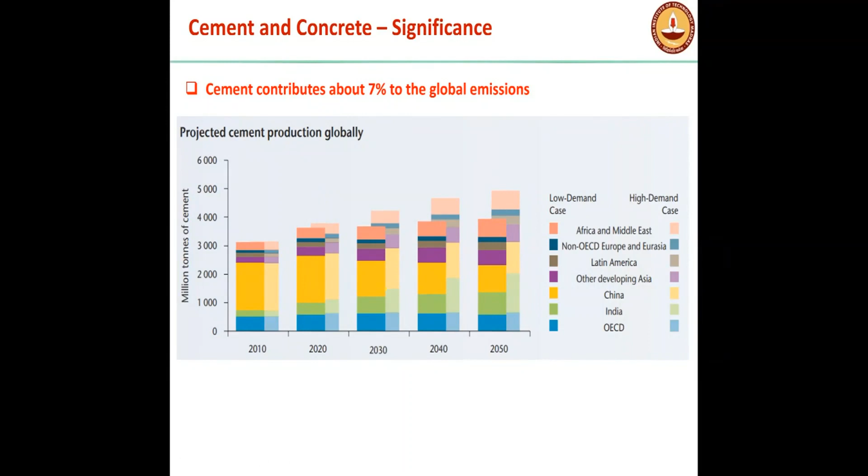So this means that whenever we can use less cement, if we can make cement more sustainable, we are going to do ourselves and the planet Earth a big favor.

Why is this relevant to us? I will focus on India. I will show examples of India. This can be extrapolated to all developing countries for sure. India is the second largest producer of cement in the world, though it is also one of the most energy efficient. Now, in this scenario, what can get worse?

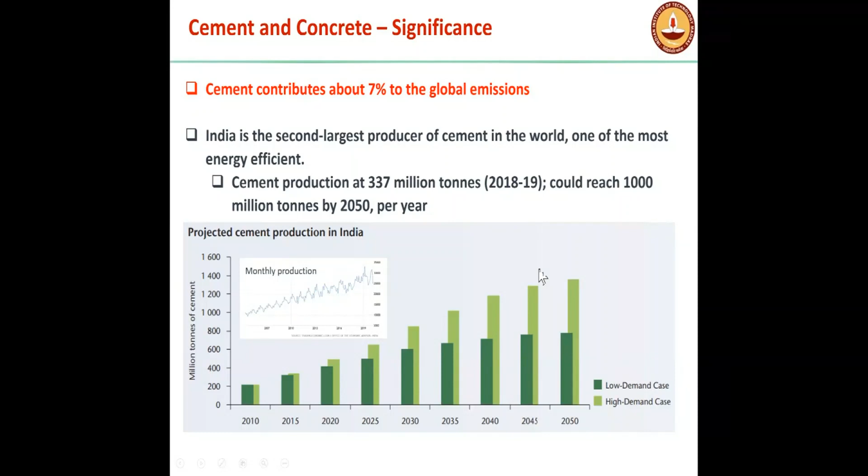So for sure, we are going to use a lot of cement. The fact that we are producing so much cement means that we are also using a lot of concrete, estimated at 1,000 to 2,000 million tons per year, and this could reach about 5,000 million tons. Why? Because we have to build a lot.

Just like India, there could be many other countries in the world which need to build a lot. We need to provide housing. In India, it is expected that we would need 15 to 30 million units, 10 billion square feet. Our highway network is expected to double within this decade, from about 110,000 kilometers to 200,000 kilometers. So this means that we are going to use a lot of concrete. For this, we need a lot of cement.

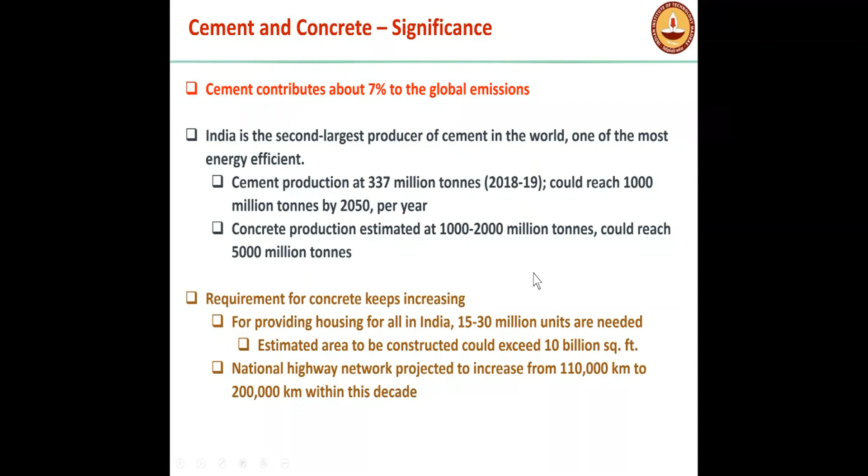So what do we think about the sustainability? Concrete, I believe, is sustainable for several reasons.

It provides jobs in the construction sector, especially for unskilled workers. Of all the materials we have, concrete has lower embodied carbon footprint. It requires less energy than many other materials out there. Raw materials are reasonably abundant in the world today. We have enough limestone, and other materials that we can use for making cement and concrete. Construction with concrete provides for strength, safety, and healthy living conditions.

We have seen in many of the lectures that concrete came up again and again. We talk about rehabilitation, we talk about resilience, and concrete is always there. But things are always not great.

Quality is something that is not always ensured. When we are talking about a material like concrete, which can be made anywhere, we are not sure about the quality. Durability is not designed for nor guaranteed. We heard a lot about durability in this session from Professor Basheer and others earlier. Durability is something that is very important. We don't give it a lot of attention. We need to, certainly.

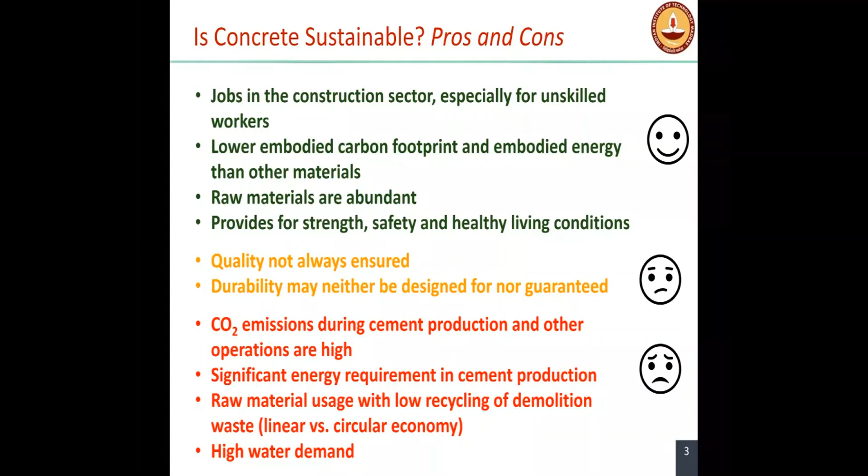So for considering all this, what will happen in the future? We expect changes. Fuels could change. We don't know if we will have all the fossil fuels, what restrictions will be there, and can we utilize alternative fuels.

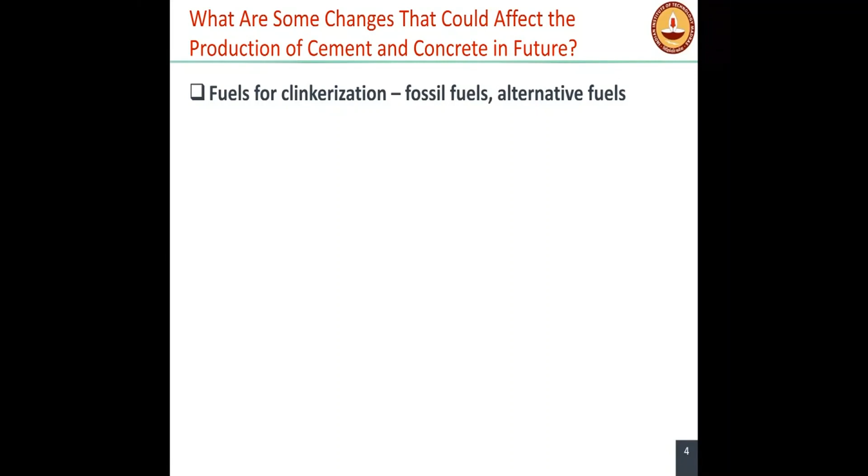What will happen to the consumption of electricity? Will there be enough electricity for cement? What will happen to the carbon footprint of electricity? We have seen that we incorporate a lot of supplementary cementitious materials. We reduce the amount of clinker in the cement. Will that continue?

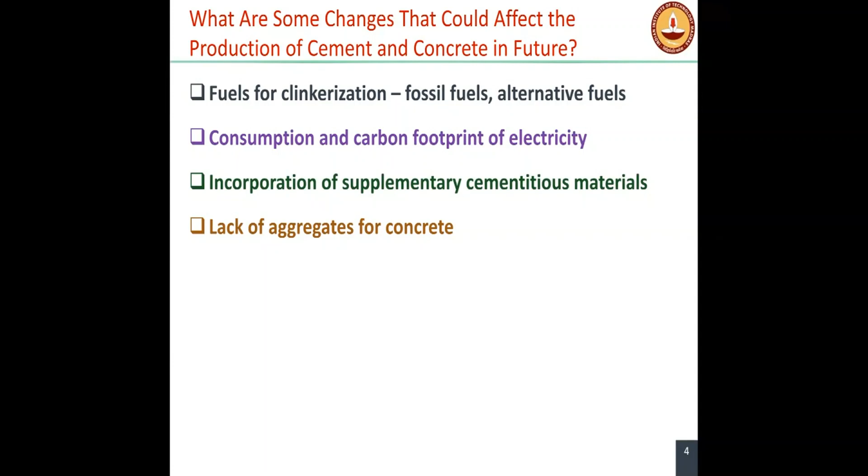Aggregates are a big problem in many of our regions. What will happen if aggregates are not there? Will we continue to make sustainable cement and concrete in the future? So the question is, will the sustainability of concrete be affected? In what way and how much?

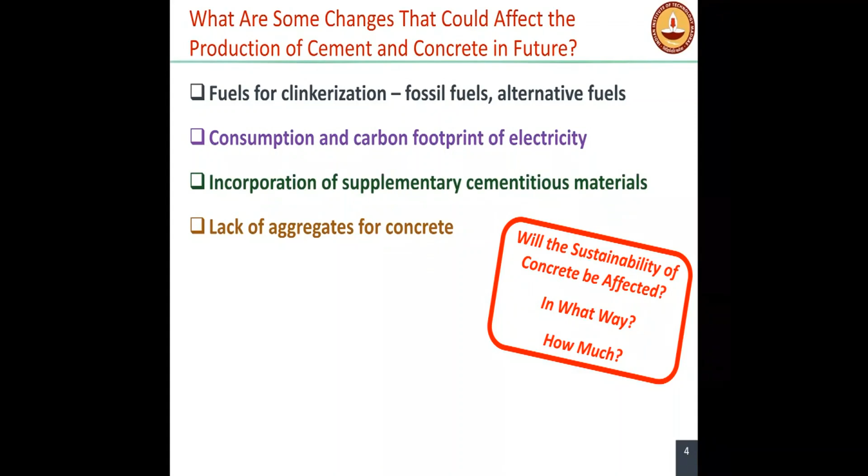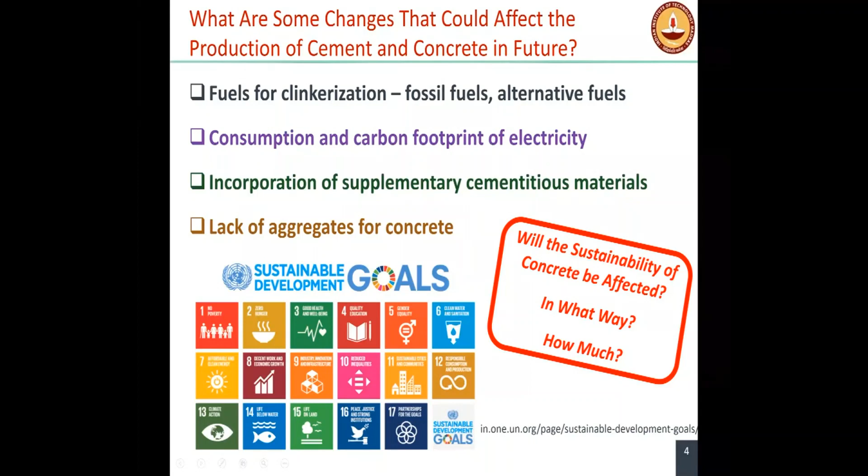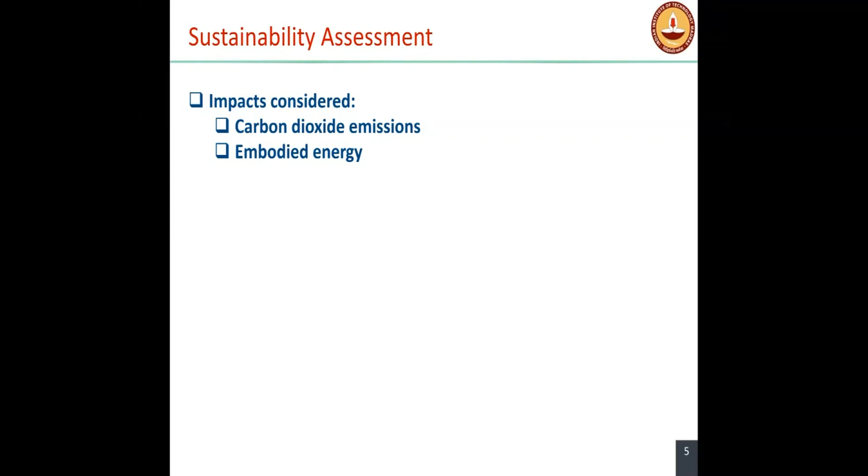So we won't be able to take care of all this in this discussion. I will focus mainly on the carbon footprint that can affect climate change and energy. Energy also means that cost is affected. If you use more energy, we are also talking about more expensive production and more expensive fabrication. So our sustainability assessment for now in this talk will consider two impacts: the carbon dioxide emissions or the carbon footprint, and the embodied energy or the energy that is required to make cement and concrete.

How are we going to go about this? We use the technique of life cycle assessment, which defines the system, which draws the boundaries of what we are going to use for the calculations. Here we consider the gate-to-gate system. So the gate-to-gate system is what occurs within the plant, within the control of the cement fabricator or the concrete fabricator. We leave out certain aspects where we do not have reliable data. We can also do that, but in this presentation, I'm going to talk about the system which is gate to gate. That is, whatever comes in and whatever goes out is what is being considered.

We get data from plants directly. In a country like India, we do not have a ready-made inventory, so we had to get data from plants, cement plants, aggregate plants, and concrete plants. We convert these inventory data to the impacts. Then here what I'm going to do is compare with some baseline data. I'm going to look at how things are today and discuss with you what could happen in future.

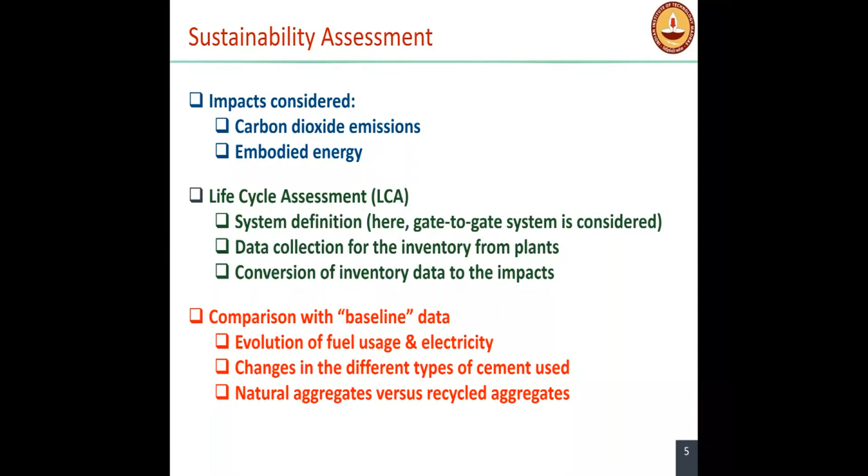What will happen when fuel usage evolves, changes, electricity changes? The types of cement, will they change? Should they change? Can they change? What if we run out of natural aggregates and have to use recycled aggregates? Is it going to make it better or worse? So these are some of the aspects that I'll talk to you about in the remaining 10 minutes.

We consider two cement plants: an older one established in 1975 in Nimbahera in Chittorgarh, Rajasthan, with a capacity of 3.6 million tons of cement per annum. They use about 120 kg of fuel per ton of clinker. They make ordinary Portland cement, OPC, and Portland pozzolana cement with fly ash. They have a captive thermal plant. They do not draw electricity from the grid, but generate their own electricity.

On the other hand, we have a more modern plant in Nandyal in Andhra Pradesh, established in 2011, also a 6-stage preheater plant with precalciner.

An integrated plant means that they make the clinker, grind it, and produce cement. They have OPC, slag cement, and also they sell slag or produce slag. Fuel use, slightly more efficient, 100 kg per ton of clinker. And they take electricity from the grid. So when I talk about concrete, I'm going to assume that we are using cement from the Nandyal plant. But I'll use both as examples to see how things will improve and how things can change.

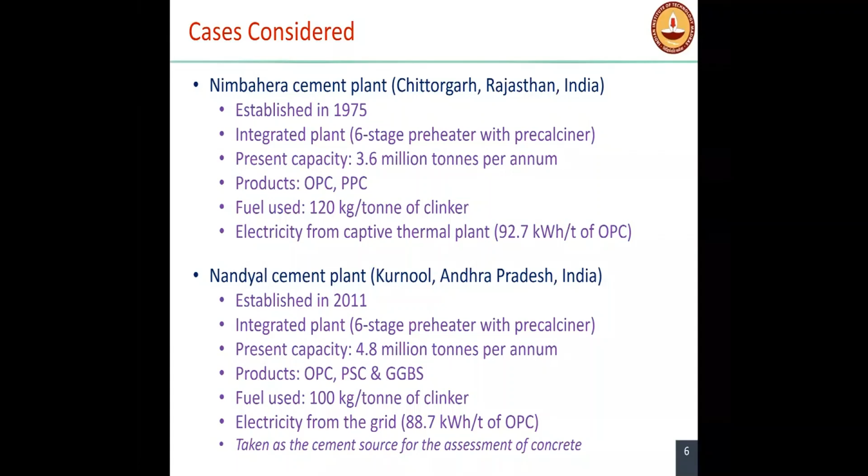Now, this is the system that we have to consider. It's a very, very busy diagram. And you can see here all the different things that happen in cement production. So on the left top, we have the production of the clinker. We have limestone coming in, other raw materials. We need fuel, coal and pet coke in this case. There are alternative fuels. A lot of things are burnt along with coal in the kiln. So all this comes in and we have clinker done.

So in the middle right, you have the clinker being produced. So all these quantities have to be taken into account to ensure that we are calculating the impact of the clinker well. To the clinker, we add gypsum and then it is ground to give us cement. So you see in the middle bottom, we are getting the values of ordinary Portland cement. To the clinker, when we add slag, GGBS, ground granulated blast furnace slag, which has to come from somewhere, that brings some impact into the picture. This gives us together the Portland slag cement.

So all these numbers and arrows tell us the distances that the material has to travel. So you see these dashed lines which are telling us all the kilometers which have to be taken into account. All these numbers tell us the electricity that went in to the fabrication, the amount of material that has gone in. So we should convert all these kilograms of materials to impacts. So this has to be the picture when we talk about the environmental impact of cement production.

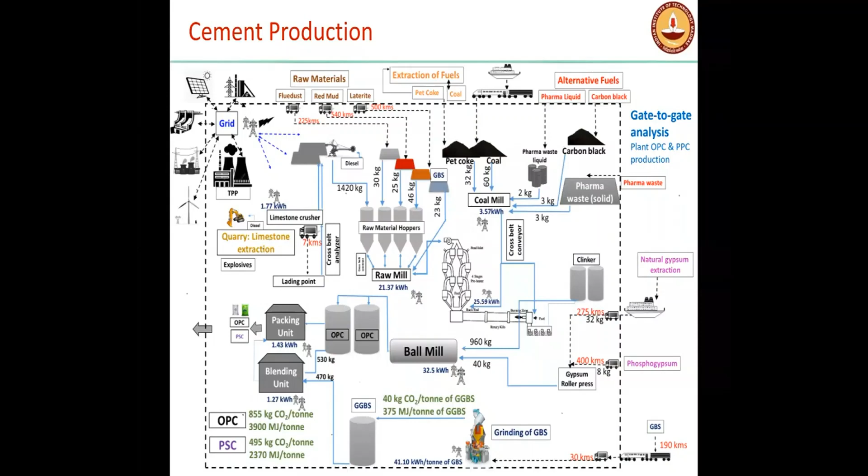Now let's see what happens if you do the calculations. In the case of the Nimbahera plant, these are the carbon emissions. 950 kilograms of carbon dioxide is emitted for a ton of clinker. Most of it is coming from the limestone, that is the gray part, and the burning of the fossil fuels, that is the shaded orange part. Together we have an effect of electricity. The Nandyal plant is slightly more effective in reducing the carbon footprint, 850 kg of CO2 per ton of clinker.

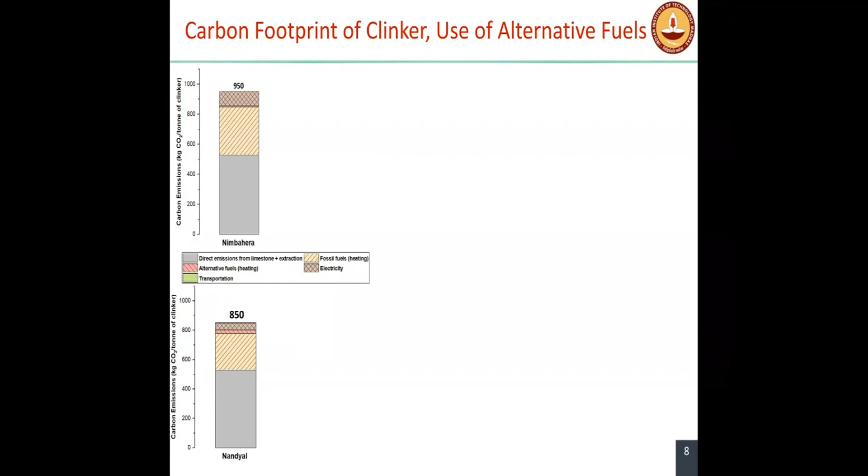Okay. So in cement production, we use a lot of fuels other than coal or petcoke. These are called alternative fuels, and you see them all listed here. We expect that this will continue to increase. CEMBUREAU in Europe has targeted for 2050 24% biomass, 36% other alternative fuels. So what can we expect for a country like ours? In this plant in Nimbahera, 2% alternative fuels are used. Suppose we increase it to 10%, 30%, and 60% as CEMBUREAU. What we find is, though we save a lot of coal, we are going to increase the carbon dioxide emissions because these alternative fuels are not as efficient as coal.

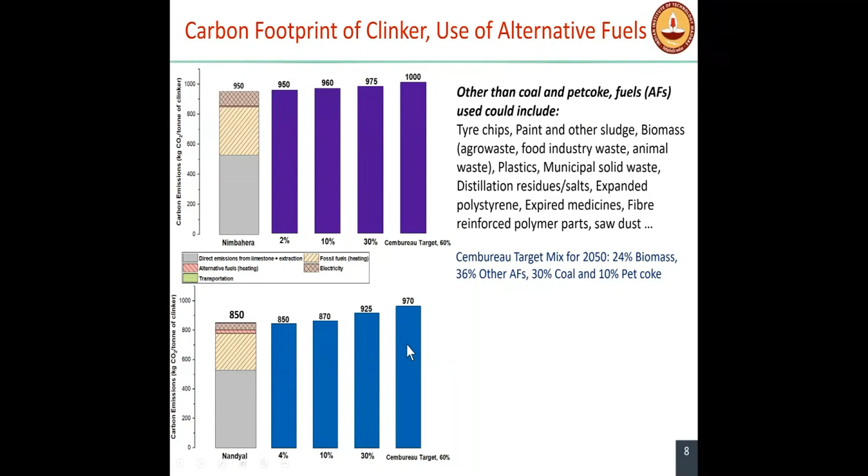Similarly, in the plant at Nandyal, we find that as we increase the amount of alternative fuels, things are going to get slightly worse in terms of CO2 emissions. However, we will have saved a lot of coal. So a lot of coal is saved if you switch from coal to alternative fuels. So the consequences clearly are, there is significant savings in coal. There is a lot of consumption of waste which otherwise would be dumped, but at the expense of a slight increase in CO2 emissions. Okay, so this is something that we have to keep in mind.

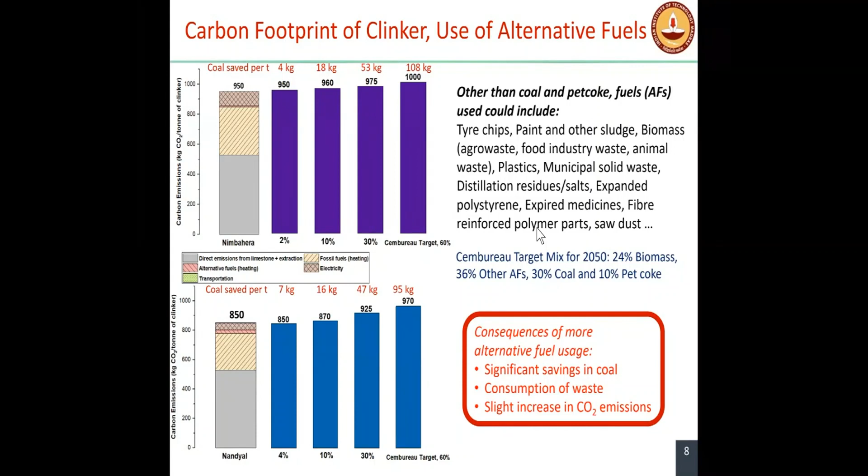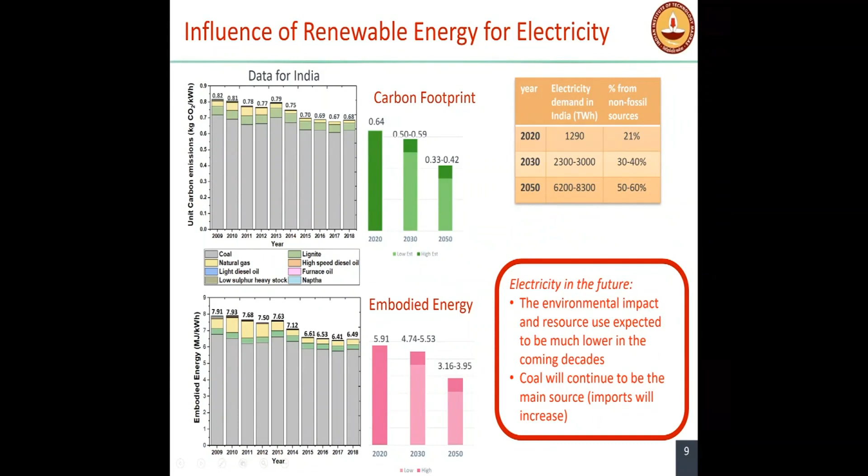What will happen to electricity? If the electricity is going to become cleaner, the carbon footprint is going to decrease. And in India, this seems to be the trend. We are having less and less carbon footprint of our electricity. Embodied energy is going down, and we find that this is because the percentage coming from non-fossil fuels is increasing. We are getting more electricity from non-fossil fuels. So this means that we would expect electricity to have a lower environmental impact. The resource use is better. However, coal will continue to be the main source, and we expect that imports will continue to increase.

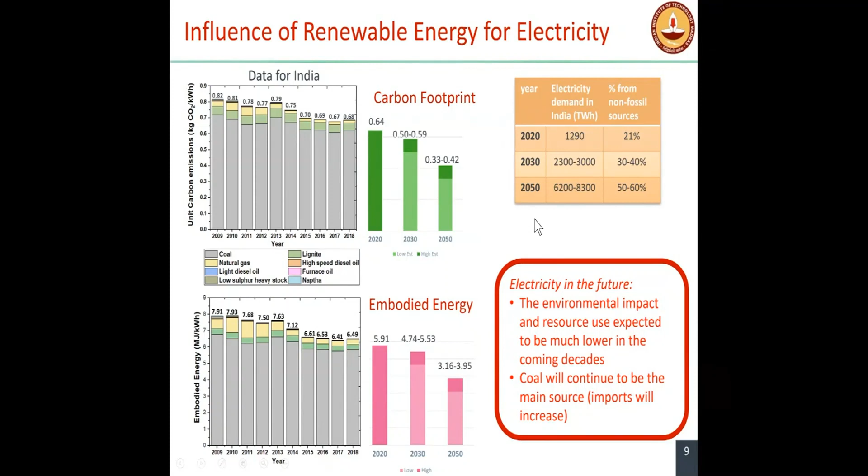So what does this mean? Suppose a plant like Nimbahera, which had its own captive thermal power plant, switches to grid electricity, we would save a lot of coal. And overall, the carbon emissions would decrease and the energy would decrease because it is more efficient to use electricity from the grid rather than electricity made at the cement plant.

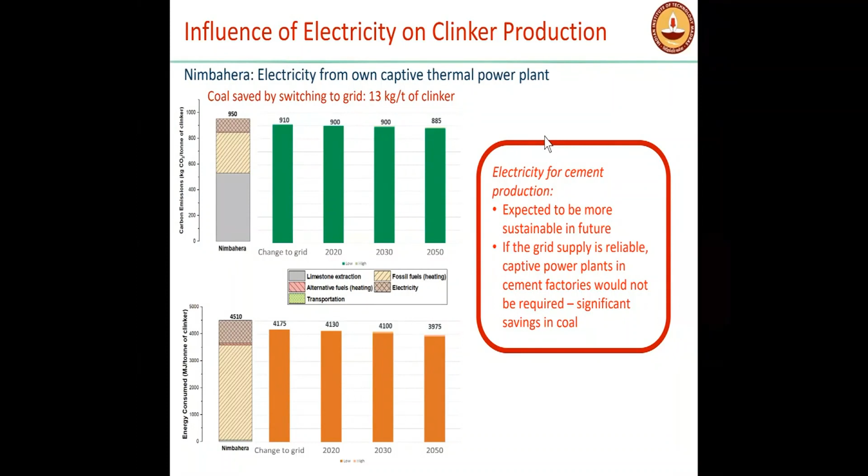So if we have to speculate for the future, we would expect that electricity for cement production would be more sustainable if we can ensure reliable grid power. Captive power plants are not necessary, and we would therefore have a significant savings in coal, which is required for the captive power plants. So what if we put all this together?

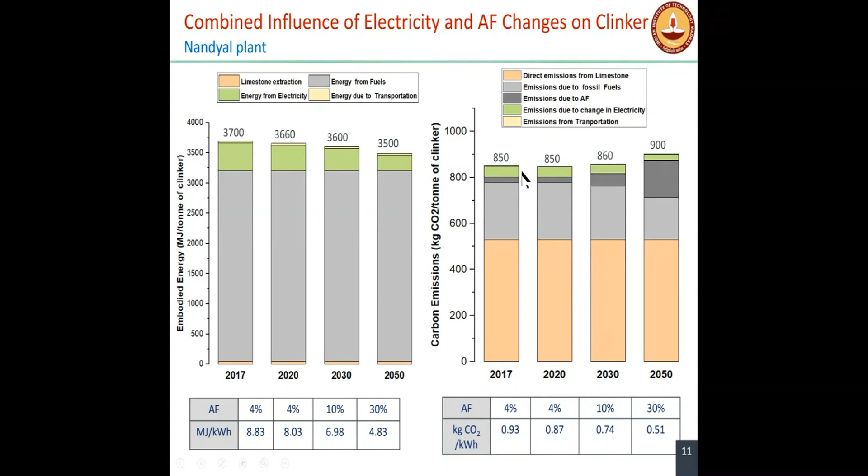What will happen to the clinker? So we would find that the clinker of the future would require less energy, would use a lot of waste material, however, may have slightly more emissions than we have now.

What will happen to cement? We talked about clinker. What happens to cement? So cement is ordinary Portland cement, Portland pozzolana cement, and slag cement in India. In future, we expect LC3 or the limestone calcined clay cement. Here you have the amount of clinker in the cement and the SCM or the supplementary cementitious material which goes in.

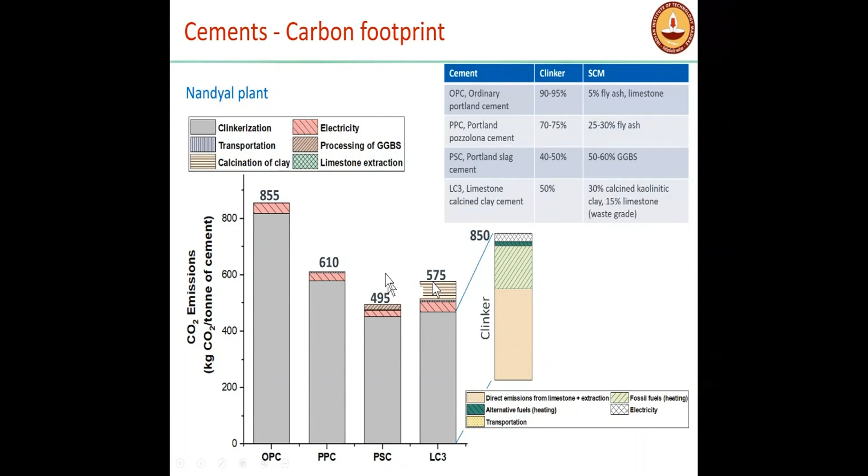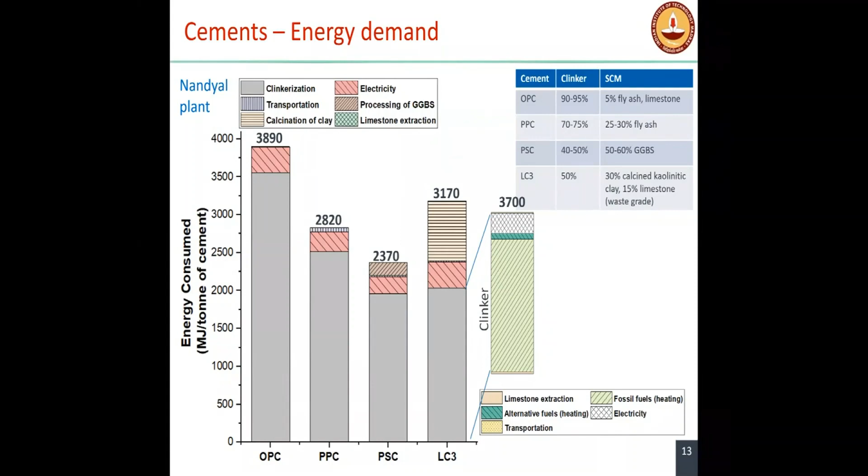So clearly we find that as we decrease the amount of clinker, as we use supplementary cementitious materials, we are going to have a better material. And again, if we were to speculate on what could happen in the future, I would say that things are going to become better in terms of an average impact of cement. What have we done here? We've tried to project what could happen to the amount of cement or the different types of cement made in India.

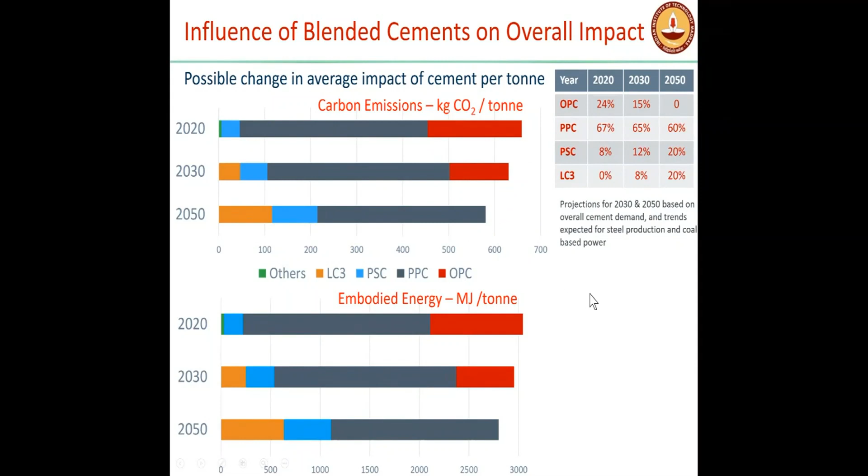So therefore, can you stop in a minute, please? Yeah, I'll do that. So bringing this together, we have the combined influence, and I will rush through and finish.

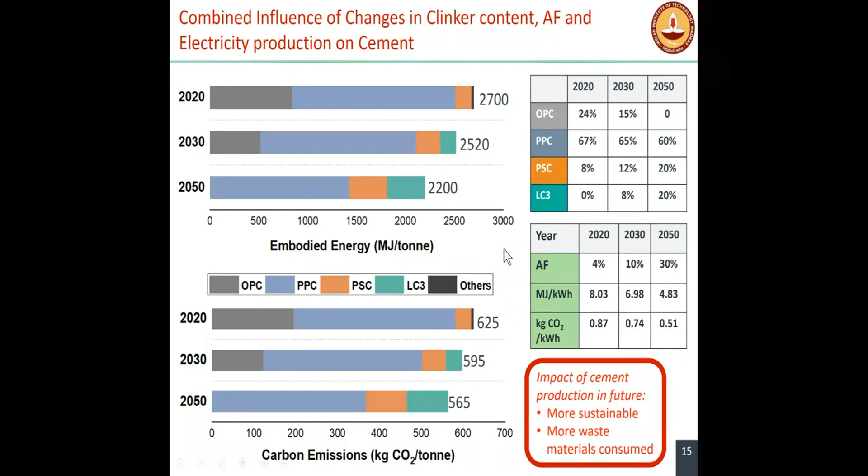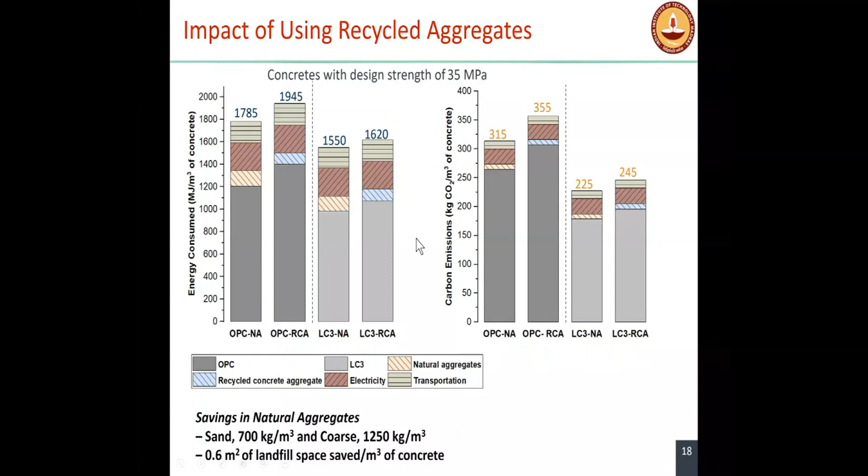So this translates to concrete also becoming more sustainable because of lower energy and lower carbon footprint. Suppose we had to make the concrete with recycled aggregates. This would be the picture. Slight increase in carbon footprint, but savings in a lot of material and saving in space for landfill.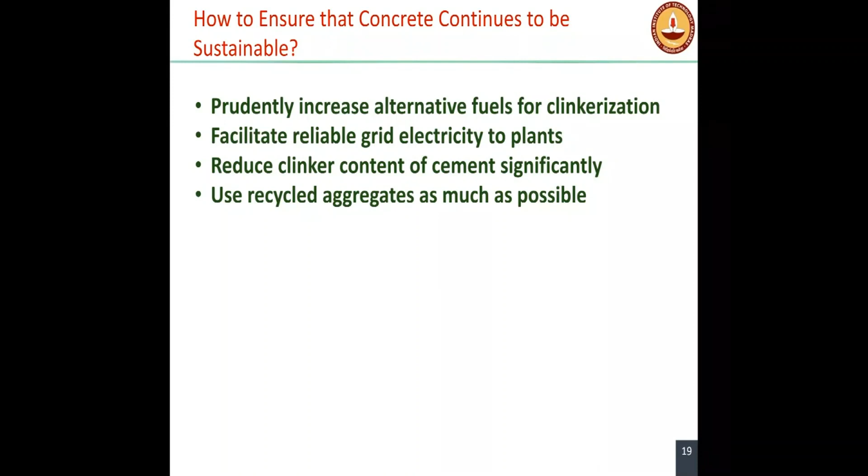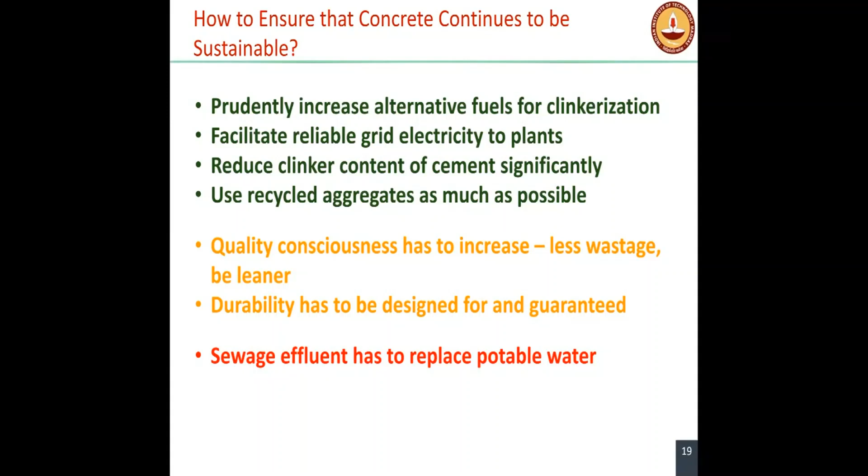So to conclude, we can continue to have concrete and cement as sustainable materials. We have to be prudent in how we use alternative fuels, how we use electricity. We have to work on quality and durability, and if we can use water from sewage or alternative sources, that would be very good. Thank you very much.

Thanks, Bashir. Sorry, I overstepped. I'll be glad to take questions if there are any. Yeah, thank you very much, Ravindra.

It is nice to see the different pictures coming together, and it is important to look at the holistic aspect of the cement and concrete manufacturing. So that is actually very clear from your presentation. So I think we had a comment from, let me see. Yeah, Wolf just made a comment.

Based on the data you provided, does it mean before cement producers think about energy and the process changes, replacing clinker will always have a significantly higher positive environmental effect? It looks so. It looks so from all the scenarios that we've looked at.

The biggest change will be reducing the clinker in the cement. That is certainly going to help in terms of the environmental impact. Okay, thank you. So another question is, what about organic cement? What's their role in the future?